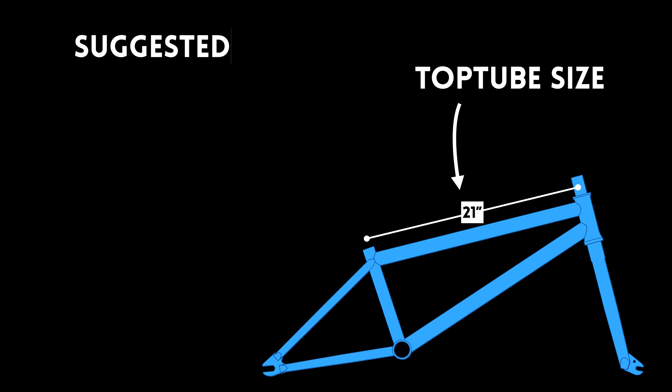Let's talk about the sizing of this bike and determine if this bike is the right size for you. Like I mentioned earlier, it has a 21-inch top tube. This 21-inch top tube is best for riders who are over 6 foot. If you're abnormally tall, like 6'7", if you're just really tall, you might want to look at a bigger frame.

Like the Subrosa Tiro XXL's 21.33, the Sunday Dark Wave is a 21.25, and the Fit Trail XXL is a 21.25. Those are really the only 3 options that are available over 21. And I'm 6'4", I ride 21.25, but I've been on a 21 for a while. So I mean, after you get about 6'3", it's kind of at your own discretion.

For anyone over 6 foot, I'd say this is a good thing for you, but if you get too much taller, then you got to find something different. But for the most part, you're going to be fine. But if you're abnormally tall, just know you might want to look at something else. Join the Discord, ask that question in the Discord, and I'll help you figure out which size is right if you're way taller.

So on the frame, there are 4 other geometries that are going to affect how the bike feels and how the bike handles. Some bikes are snappy, some bikes are mellow. The Kink Whip XL has a 75-degree head tube angle, a 9-inch standover height, a 13.25-inch chainstay, and an 11.6-inch bottom bracket. Overall, these sizes are pretty normal. They're the exact same as most of Kink's lineup.

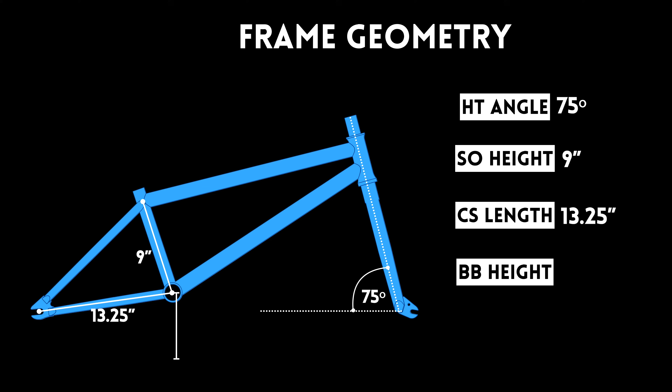The only thing here is the chainstay is technically a little bit longer than average. I say 13 is right in the middle of the 2 extremes that we see on complete bikes. So 13.25 is a little bit longer. And this is just going to give the bike a more stable feeling on the back end.

Manuals aren't going to be as snappy to get into. They're going to be easier to control, but you're going to have to put more effort into getting into those manuals. The other geometries on the parts also have an effect on how the bike handles and how the bike feels. Some parts make the bike feel more mellow, some parts make the bike feel more snappy and responsive.

The Kink Whip XL has forks that have 32 millimeters of offset. The handlebars are 9.25 inches tall. This is a 1/4 of an inch taller than the normal Kink Whip, and we don't know how wide they are. I'm gonna guess they're about 30 inches, but we don't know for sure.

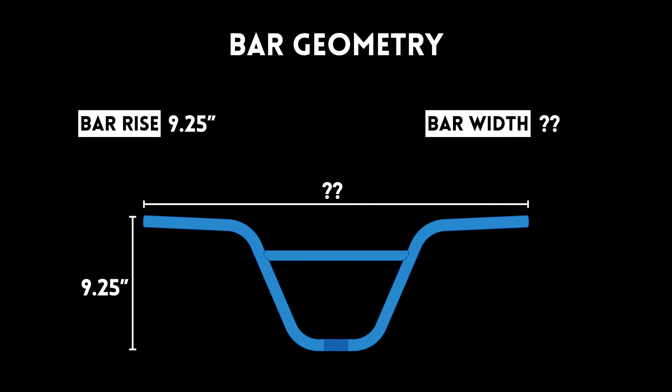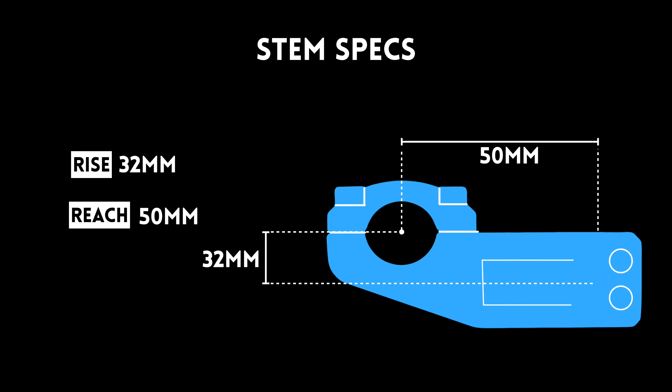The stem on the Kink Whip XL has a 32 millimeter rise. It's a top load stem, and it has 50 millimeters of reach. The sprocket is a 25-tooth sprocket. The driver is a 9-tooth driver, making this bike 25/9. This is very standard for all complete bikes. Everything's gonna be on the right-hand side, making this bike right-hand drive, and it has a cassette instead of a free coaster.

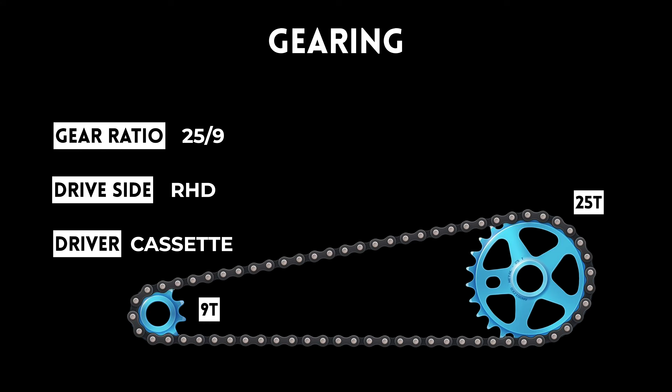The quality of this bike determines how long it's gonna last. It's best to get the highest quality bike that you can afford.

The frame on the Kink Whip XL is a full chromoly frame, meaning all the tubing that makes up the frame is full chromoly. This is much better than high tensile steel, about 4 times stronger, and it's the way to go. If you can afford chromoly, go with chromoly.

The forks are also full chromoly. Unlike the Kink Gap, which has 50% chromoly forks, the Kink Whip has forks that are full chromoly. They're gonna last a lot longer, and you're not gonna have too many issues.

The handlebars are full chromoly 2-piece handlebars on the Kink Whip XL. It also has full chromoly 3-piece 8-spline cranks.

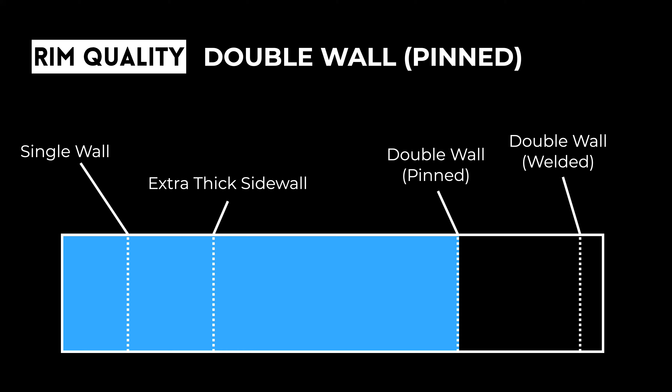The Kink Whip XL has Mission Mylar double wall rims. These are pinned rims, which aren't quite as strong as welded rims, but they're still very strong compared to single wall rims, and they're the best thing you should get if you're a heavier rider.

Let's look at the highlights and lowlights of the Kink Whip XL's part package. Some of the highlights are the Kink Bold HRD aftermarket stem, the Kink Hemlock pedals, and the fact that it has fully sealed bearings. Some of the lowlights are the weak 410 chain, the heavy Kink Sever tires, and the fact that it has no pegs and no hub guards.

Now let's talk about how the Kink Whip XL scored in quality compared to other bikes and discuss the weight limit for this bike, if any. This information is from the Dougsterbob app, which is available for free on the Google Play Store and the Apple App Store. If you're comparing bikes, this is a must-have tool to make your life a lot easier. The Kink Whip XL scored a 6.9 in quality.

This gives it a weight limit of around 200 pounds. I say around 200 pounds because this is something I've gone back and forth on. If you're a heavier rider, around 250 and up, you really are going to have some issues with bending the sprocket, bending the pedals, things like that. What I tell people when I recommend this bike and they ask, hey, I'm 250 pounds, is that still good?

I'm like, look, it's fine for the most part. The main components are full chromoly, that's solid. But if you can afford an aftermarket quality bike like the Sunday Soundwave or the Wethepeople Envy, something of that caliber, you're gonna enjoy it a lot more. It's gonna make your life a lot easier. Now, if you're under 200 pounds, you're fine, the quality on this bike is solid. But if you're a little bit heavier, some of the parts aren't gonna last as long, and you should expect that if you do buy this bike.